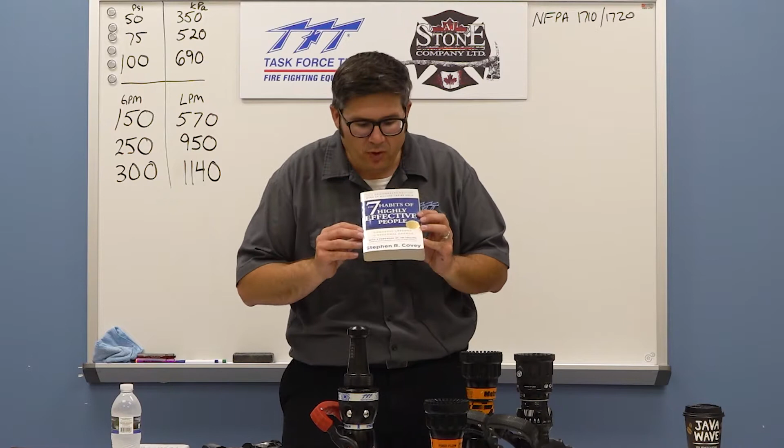So the first thing we're going to dig into right now is general hydraulics and water flow. And I want to reference a book to start us off, The 7 Habits of Highly Effective People by Stephen Covey. The reason I bring this book up is because one of the 7 habits is begin with the end in mind. In other words, what do we want to accomplish when we set out on a new experience, on a new journey, or when we even talk about water flow?

Sometimes in the fire service, we get right into the battle. Smoothbore versus fog, selectable, automatic, this nozzle's bad, this nozzle's good. Before we get into any of that, let's begin with the end in mind. What do you want to accomplish out of your hose line? What is your target fire flow rate? And that's what we should focus on before we get into the types of nozzles. Because at the end of the day, any nozzle, no matter whether it's a smoothbore, fixed, selectable, or automatic, I am able and you are able to get the flow rate that you want out of whatever nozzle you choose. So let's begin with the end in mind.

How do we answer that question of, well, what should my target fire flow rate be? Well, ultimately, it is up to your decision for your response district and your department. But the good thing is there's resources available to you to help make that decision easier. And one of those tools to figure out a target fire flow rate is NFPA 1710 and NFPA 1720. NFPA 1710 is for career departments, NFPA 1720 is for volunteer departments. During my research and preparation for this class today, NFPA 1710 was the only standard that I found that references target fire flow rates.

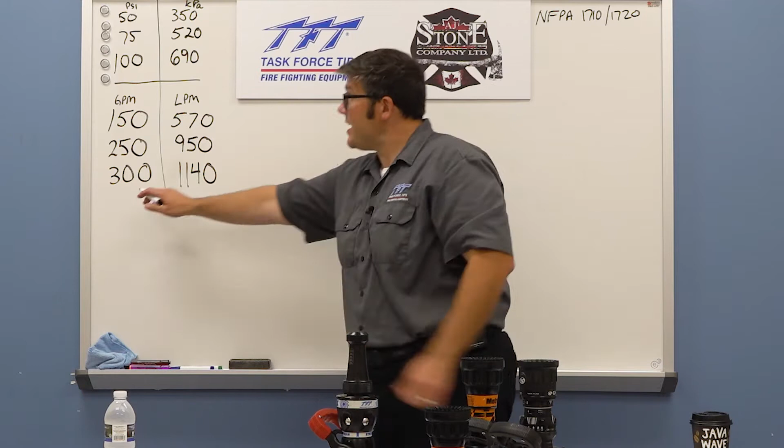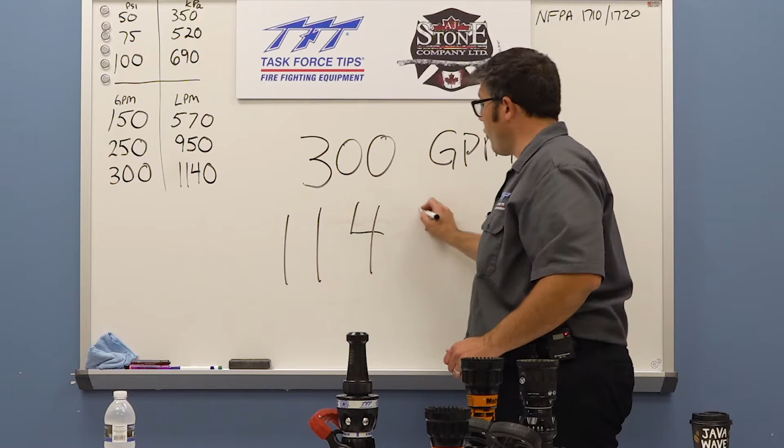NFPA 1710 says for a common single-family dwelling, 2,000 square feet or 186 square meters, your fire department should be able to establish an initial fire attack flow rate of 300 GPM or 1140 liters per minute. Now, that's just a general guideline, but a basis for a lot of fire departments in all of North America.

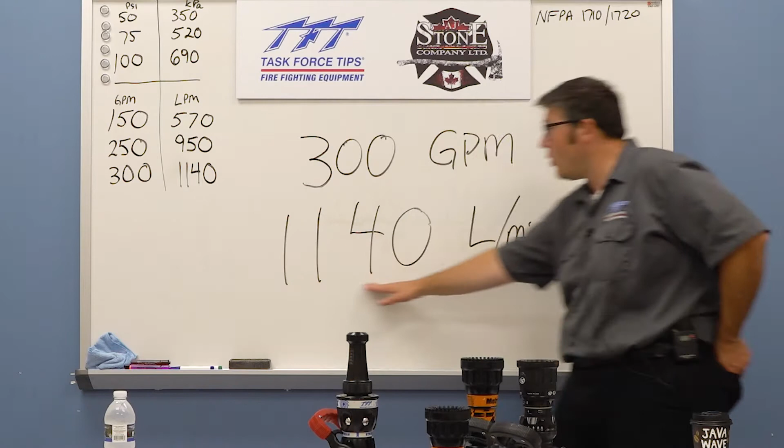This is why when you talk to a lot of fire departments across the country, they have a target fire flow rate of 150 gallons per minute, which is about 570 liters per minute. They have that because to get to this number, 150 out of 2 hose lines equals 300 gallons per minute, or 570 liters per minute out of 2 hose lines gives you 1140 liters per minute. That's why the fire service has derived 150 GPM or 570 liters per minute as a general guideline for a target fire flow rate. Another resource in your backyard is Laura King of NFPA Canada, and NFPA.org allows you to access any of the NFPA standards to help with your decision.

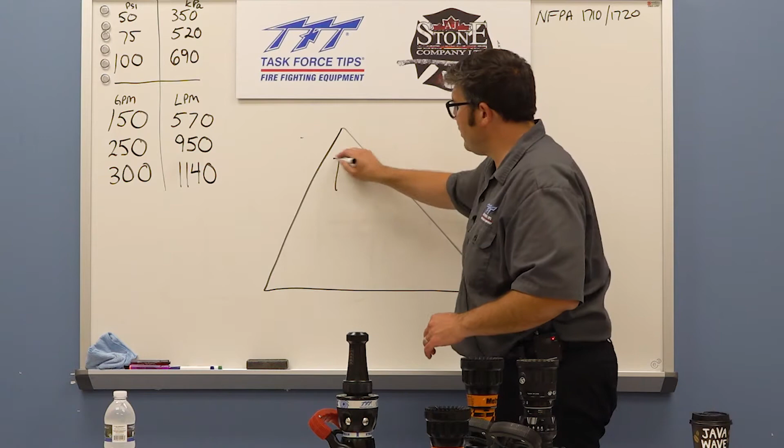Let's talk about flow and pressure a little bit and general hydraulics. So keep in mind, when we all joined the fire service, there was one thing we all learned, and that was the fire triangle. I know technically it's a fire tetrahedron, but bear with me a little bit. Give me a little leeway. The fire triangle was fuel, heat, and oxygen. You take one of those things away and the fire goes out.

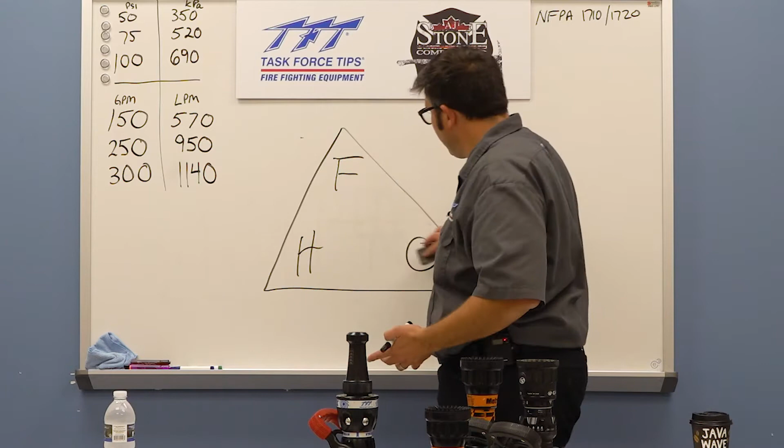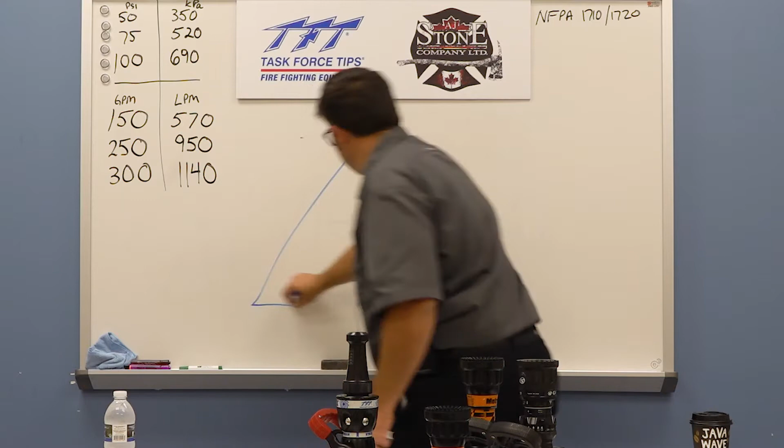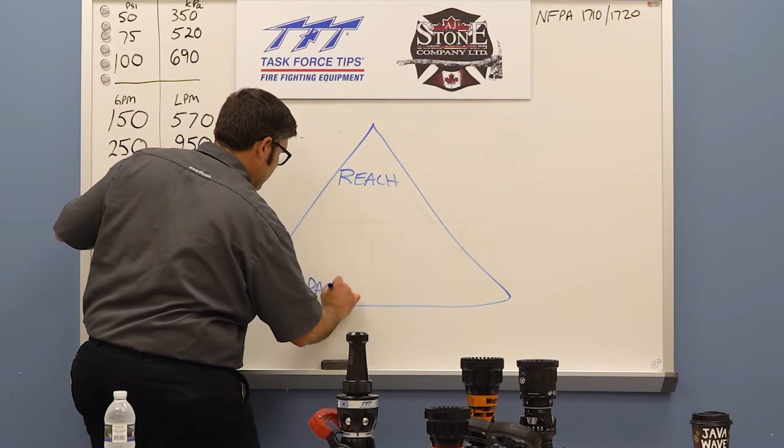I've come up with something called the water flow triangle. And I kind of just made it up on the fly, but if anyone has made it up before in the past, I will give them credit. I just came up with it throughout teaching different classes. So I want to introduce to you the water flow triangle. You have reach, you have impact, and you have reaction force.

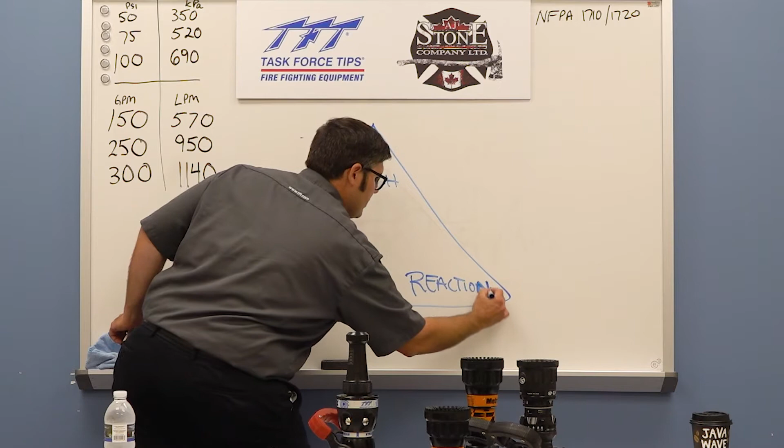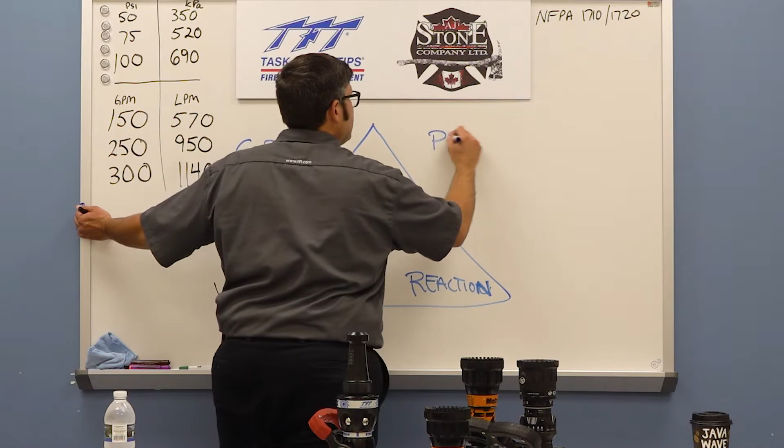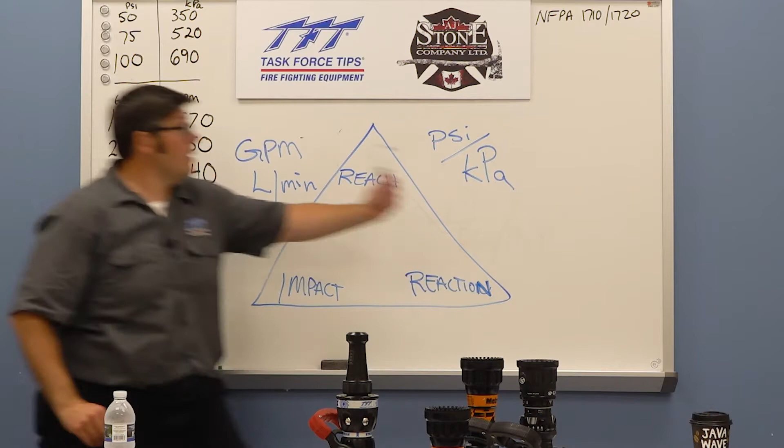Reaction. So GPM, or liters per minute, PSI, or kPa. The liters per minute is how much. The kilopascal or kPa is how fast. That's the basis of water flow.

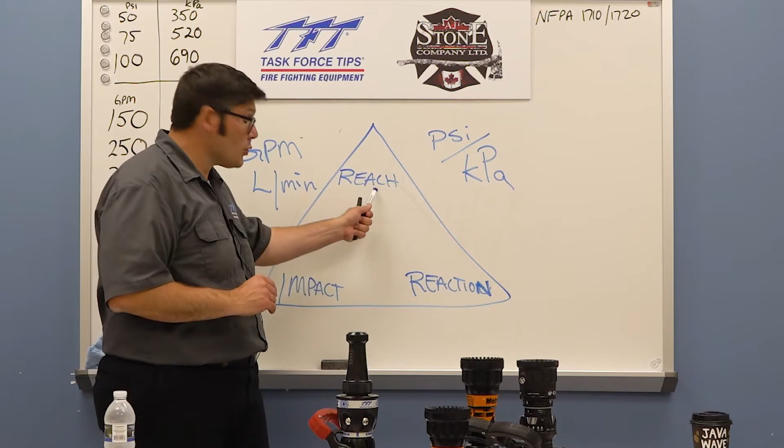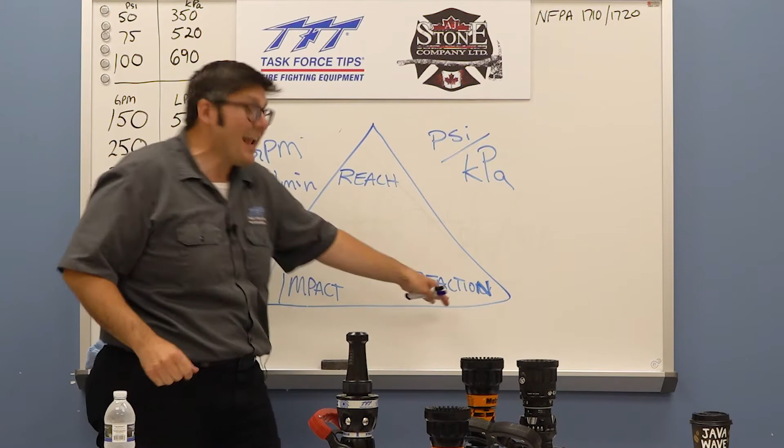The water flow triangle contains reach, how far does the stream reach, impact force, how hard does the fire stream hit the wall or hit the seat of the fire, and reaction force. How much force am I feeling coming back on me at the end of the hose line?

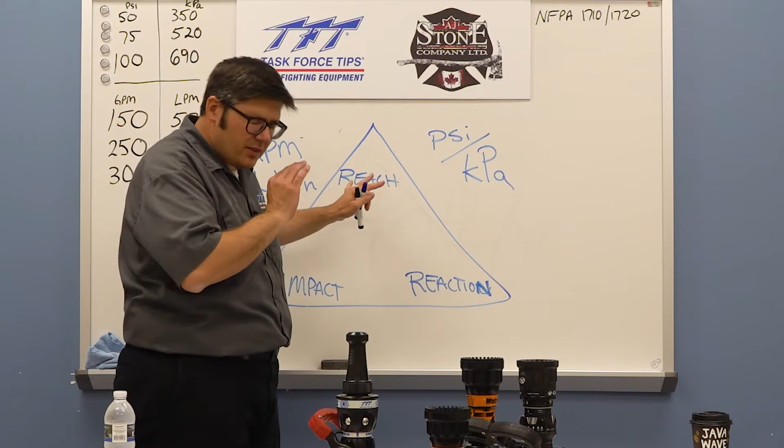The basis of this water flow triangle, if you change how much, liters per minute, or you change how fast, kPa, if you change one or both of those, you're going to have an effect on reach, impact, and reaction force. That's just how water flow works and the principles of physics.

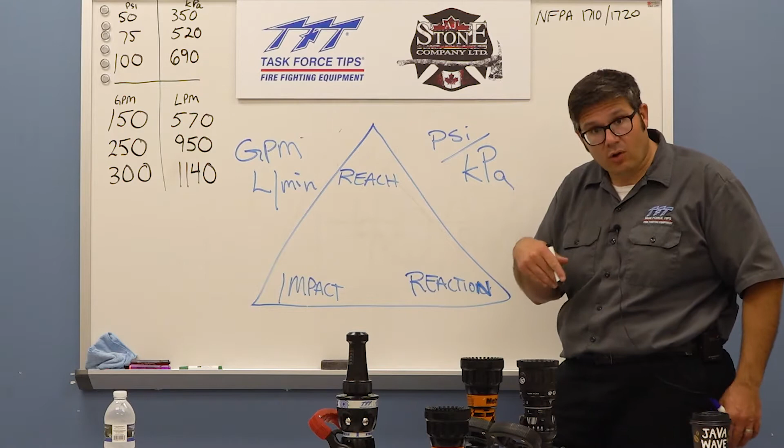You change how much or how fast, and you're going to make the reach higher or lower. You're going to make the impact force higher or lower, and you're going to make reaction force higher or lower. So that's a basic water flow triangle. Now, back to the question, how do we know what we're flowing out of our hose line? And what are we actually flowing?

Well, just like anything else, you need the right tools for the job. So we're going to go outside in just a second to show you how to integrate a flow meter, which is a valuable tool for any fire department. You can use it for testing, training, even during fire department operations. You can use it as much or as little as you want, but it's such a valuable tool, and there's a lot of affordable options out there for flow meters nowadays.

Before we head outside to show you a flow meter setup, I want to reference 2 books that may be valuable to you as a part of fire service leadership. First one is First In, Last Out Leadership by Battalion Chief John Salka of FDNY. Great book, very passionate writer, and a lot of lessons of leadership in this book.

Another book is more recent, Extreme Ownership, How U.S. Navy SEALs Lead and Win. This book is awesome because it constantly bounces back between a military U.S. Navy SEAL operation and a real life experience, and applying what the Navy SEALs have learned about accomplishing missions to real life scenarios. So 2 books, actually 3 books if you include the 7 Habits, that may be valuable for you for any rank of anyone in the fire service. So we're going to go outside and show a flow meter setup.

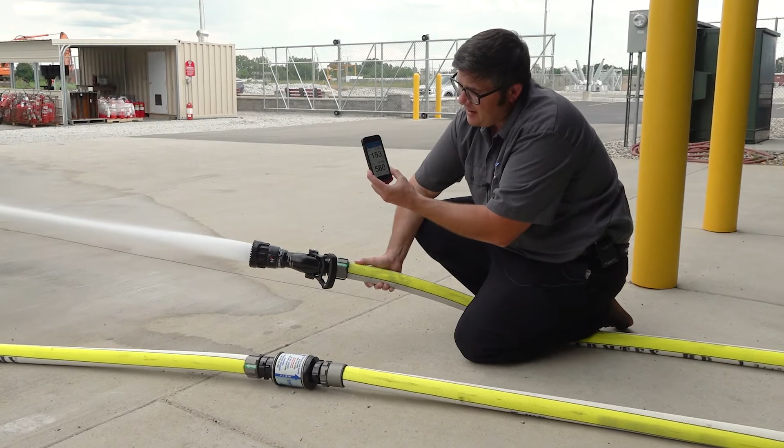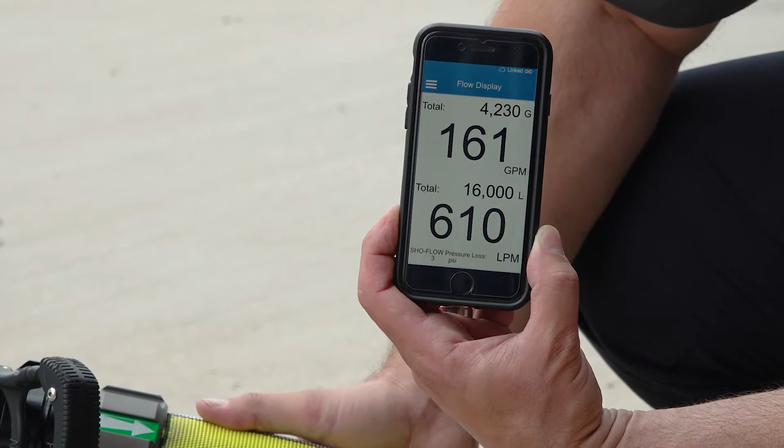The nice thing about it is it generates its own power, so you can connect to a Bluetooth signal that allows you to see the flow rate in real time. So right now you can see that we're flowing about 160 gallons per minute or 610 liters per minute. You have the ability to switch from GPM to LPM, and it's all self-generated. You don't have batteries for this flow meter, and you don't have to connect wires for the flow meter. It generates its own power and Bluetooth signal.

What a great training tool, or even fire ground tool, in the right situation to see your flow rate. Now you can adjust your pump pressure to achieve the flow rate you want out of the end of the nozzle. Going back to, what do you want your target fire flow rate to be? Next segment, we'll be walking over to the standpipe connection and talking high rise.

So just like any other firefighting situation, I challenge all of you and my own department and everyone else, evaluate the solutions that are out there. Find the one that's going to give you the maximum advantage for your response district. It's not just about what we show you over the internet or other manufacturers. It's about getting out there with your representatives like AJ Stone and evaluating solutions and finding the right fit for how you do business, and that's an important aspect.

With high-rise firefighting, you need the right tools, just like any other firefighting application. This new valve configuration is built for Class 1 or Class 3 standpipe connections.

A Class 1 standpipe connection is just a single 65 mil valve, and a Class 3 standpipe connection has the 65 mil valve, but it also is combined with a hose cabinet with probably 38 millimeter hose line. So Class 1 and Class 3 standpipe connections are what primarily fire departments utilize. Class 2 is mainly for office personnel or residents of the building.

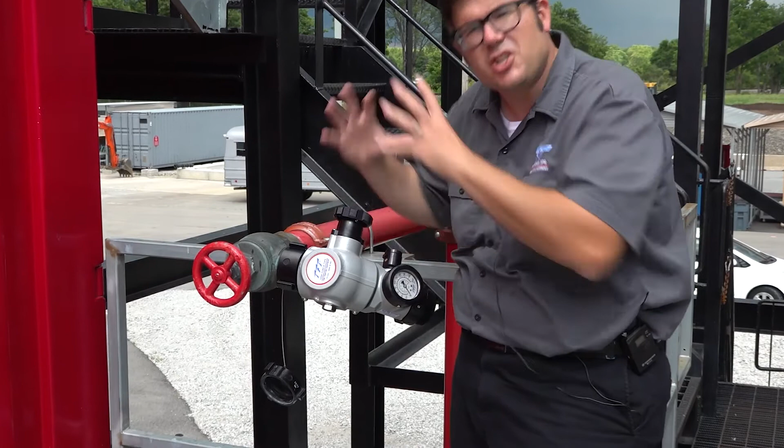So this high-rise solution gives you an advantage because it swivels 360 degrees, allowing you to position it against a wall or position it in a different configuration within a hose cabinet. It also has an inline pressure gauge which swivels 360 degrees. Again, getting the fit for your response district. You don't have to fumble with multiple pieces with this type of solution. It's a one and done, totally integrated solution that gives you the best of all the options out there in one nice, easy to install solution.

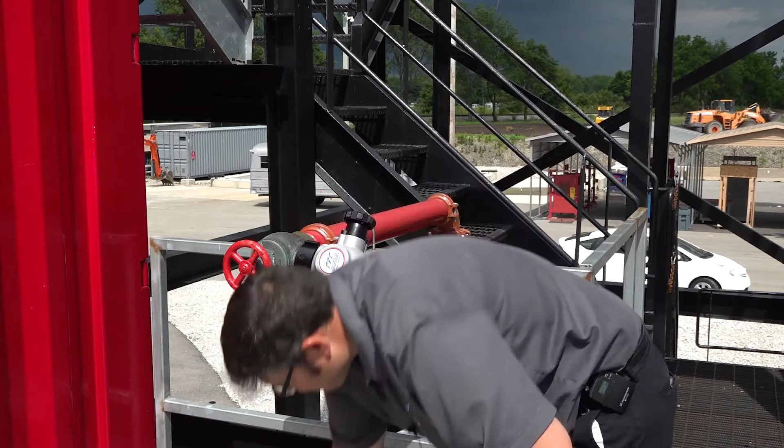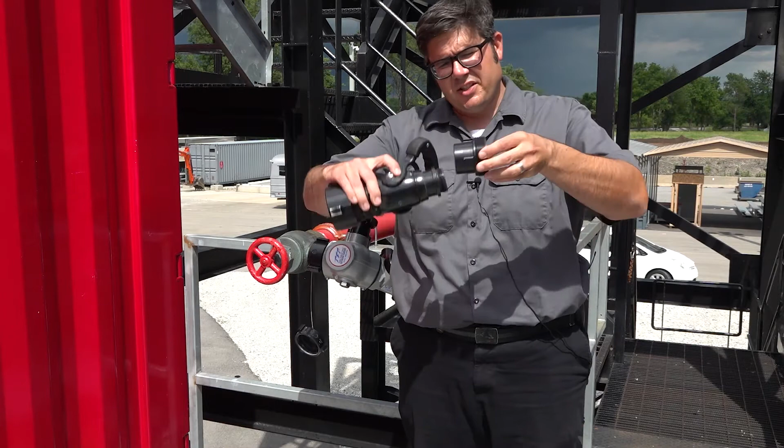A couple other tools that you may want to include in your high-rise kit: an increaser and a reducer. An increaser gives you the ability to shut your nozzle down, and out of the front end of a nozzle that has 38 millimeter threads, you can increase it and add more 65 millimeter hose line. So that's the advantage of an increaser.

We also have a reducer. This allows you to reduce the appliance down to 38 or 45 millimeter hose line, or you can actually install the reducer right to the standpipe if you want to run 38 or 45 millimeter hose line.

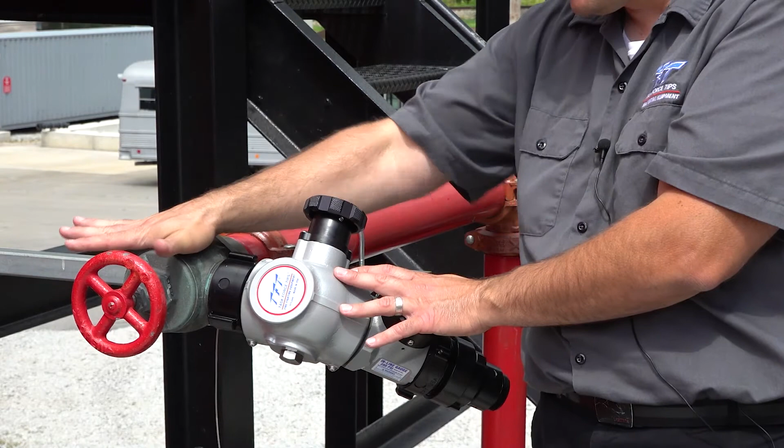There's two schools of thought when it comes to high-rise appliances. Some major departments don't want an extra valve, so they would configure this appliance with no valve. It would look the same without the valve handle. They only want to use the valve that's on the standpipe. And then the other school of thought is this: they have the valve on the standpipe, but they like to fine-tune the flow and pressure with this style of appliance. Again, what makes the most sense for your department? That's it on the high-rise segment.

The next segment we'll go over is portable monitors, and driving home the fact that it's not just for surround and drown. This is a common monitor that you would see in the fire service for quick deployment of a high volume of water. This monitor can achieve up to 500 gallons per minute or 2,000 liters per minute, but it's a very basic monitor and probably the most common in the fire service.

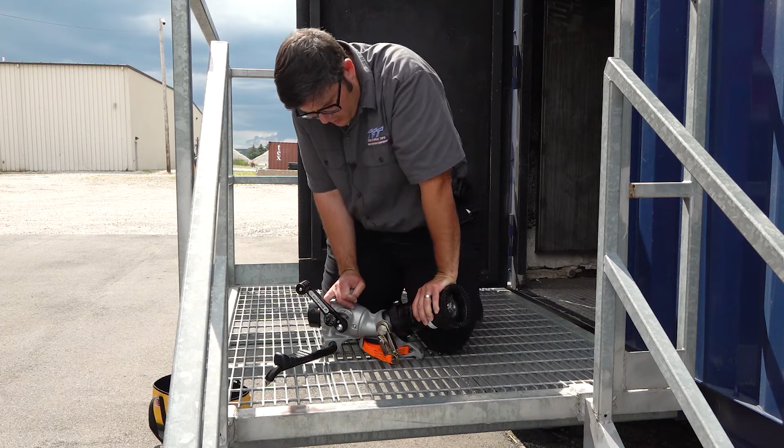It does limit your capabilities, meaning if you want a lower attack angle, you have to press down and hold in the lower attack angle. If you need a higher attack angle, you really can't do anything about that. You have to actually move the entire monitor back and forth until you're on target. There's other types of monitors out there, and this is where I challenge you again to make sure you evaluate the options out there and run them through the paces. There are other options out there that give you excellent tactical advantage on the fire ground.

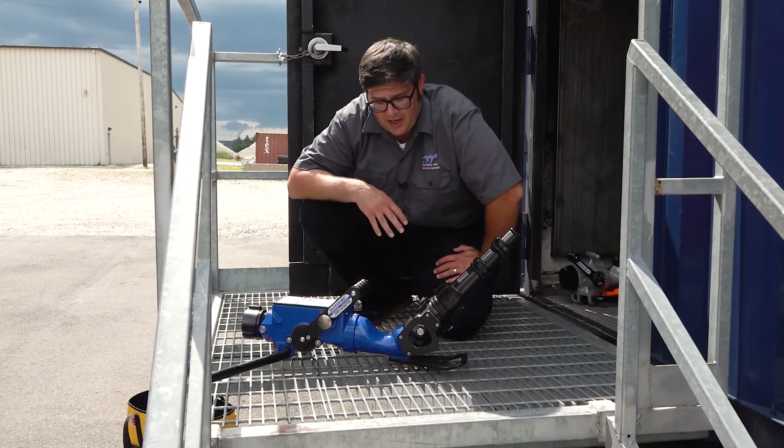Don't limit yourself to thinking about portable monitors as a defensive firefighting tool. With the right monitor, you can have superior tactical advantage on the fire ground and use it as an offensive tool for firefighting. One firefighter, one hose line can deliver a heavy knockdown on a fire or knock it out completely very efficiently. So I'll show you one of those monitors right now that give you the added tactical advantage. So this monitor right here can still achieve up to 2,000 liters per minute or 500 gallons per minute, but it gives you a lot more tactical advantage.

This monitor is able to go down to 10 degrees, low attack angle, and the benefit to this is that you don't have to press and hold that low attack angle. You set it at 10 and it's ready to rock and roll. And you're able to get into a front door, you're able to, depending on the elevation of the house, hit a basement fire through a basement window. A walkout basement you can definitely get at. Garage fire with car involvement. There's a lot of tactical advantage to this low attack angle. You can hit the heart of a kitchen fire through the front door.

Lots of advantage. This is the only monitor also that goes up to 86 degrees. This gives you a whole other world of tactical advantage and ability on the fire ground. You can get into a second, third, even a fourth story window from the ground level. You can get into the attic space of a custom built home with a high cathedral ceiling. You can get into the ceiling space fire area of a Rona or a Home Hardware, church, gym, school. You can get into the eaves of the building for an attic fire.

You can hold the stairs, protect the stairs, or protect a means of egress for your interior firefighting crew. There's so much ability that this gives you on the fire ground. But again, you have to evaluate it and pick the best thing for your department. We've covered general hydraulics, high-rise, portable monitors. The next thing we'll cover is foam delivery.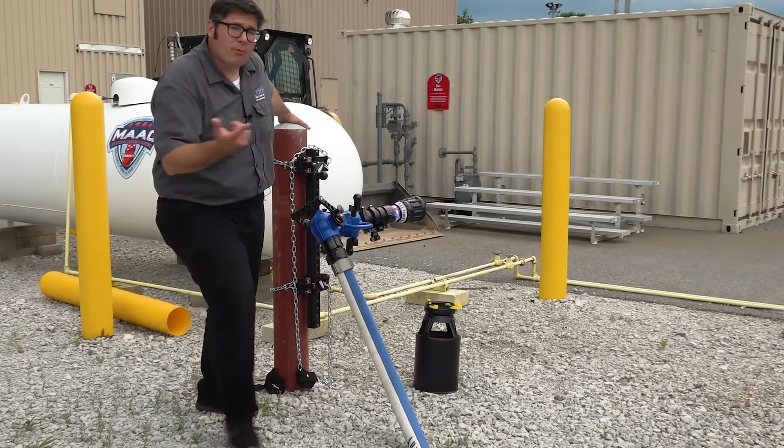So another type of portable monitor is this monitor called the Hemisphere. This is in its own category and unique. This is a monitor that's called a transportable monitor because you're able to clamp it to a parking post like this. You can operate it into a trailer hitch receiver. You can clamp it on a set of handrails. You can clamp it on a set of rated scaffolding. You can clamp it on anything 3-inch or 2 feet in diameter.

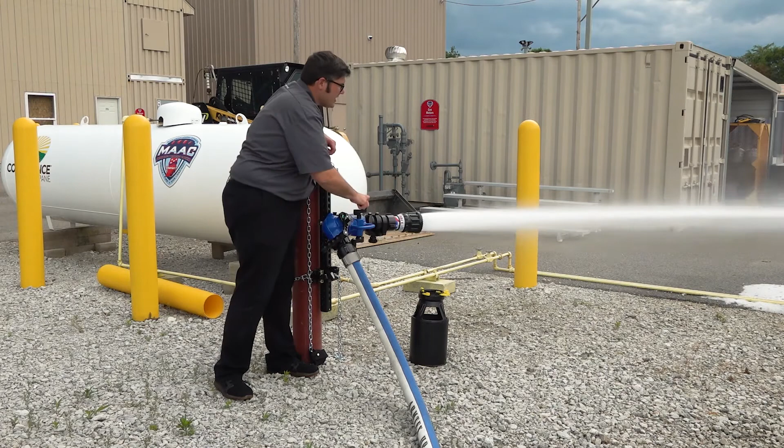And it allows you, again, to deliver up to 2,000 liters per minute from virtually anywhere. We call it the Hemisphere because you can flow water up, down, left, right, and anywhere in between. We'll start to operate it right now. So as you can see, it's very easy to operate. And you're able to adjust that flow path very easily and deliver high firefighting flow rates in a very unique way.

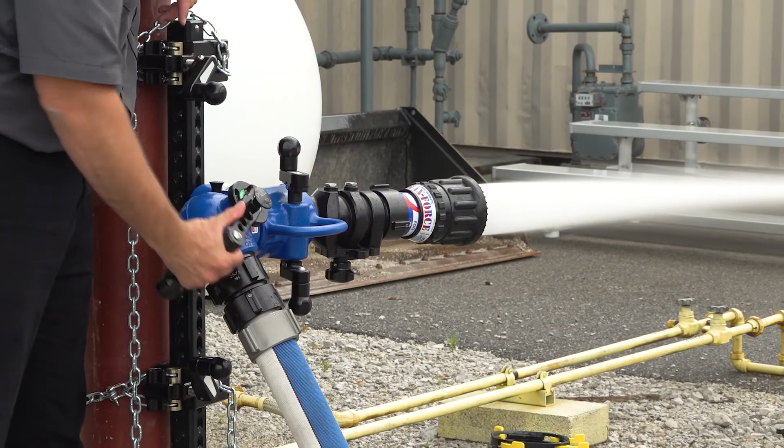The inlet of the monitor swivels 360, so you can easily attach your 65 mil hose line, and this monitor actually swivels 360 when you're not flowing water or you're unpressurized. The next segment truly will be foam delivery.

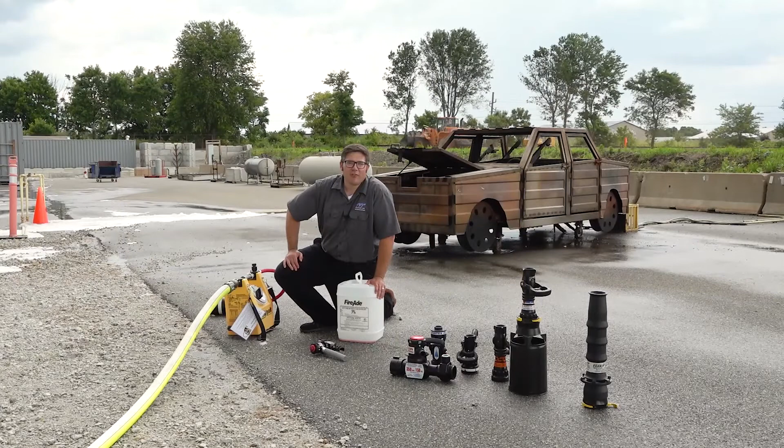All right, on to foam delivery. We're using FireAde foam concentrate today. All this concentrate is in this ProPak portable foam solution. This is a great tool because it puts the foam controls right in the hands of the firefighter themselves, not at the truck. So the firefighter can control the foam supply and the expansion ratio right here. It makes foam delivery very easy.

Dumpster fires, car fires, wildland firefighting, salvage and overhaul, shipboard firefighting, anywhere where you need fast quality foam and very easy to make. So right now I have the ProPak on 3%, and you can see this little yellow portable foam system can make a lot of good quality foam, a good quality foam blanket. I personally have used it on car fires, but it's a great tool for quick, easy to make, high quality finished foam.

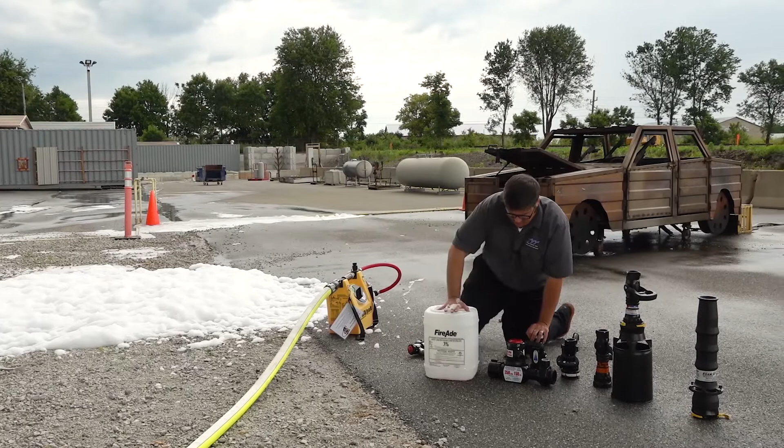If you don't have a portable foam system, there are other ways to deliver foam. There's certain variables in a foam system. This is foam concentrate. When foam concentrate is mixed with water and goes through a hose line, it's called foam solution. And when it goes out the end of the nozzle, it's called finished foam. Foam concentrate, foam solution, finished foam. So what are the variables? If you have an onboard foam system, it makes it easy. You press a couple of buttons and you start to deliver foam.

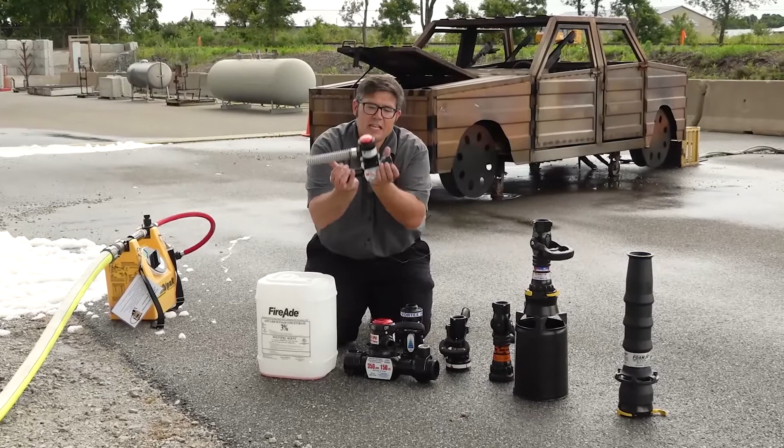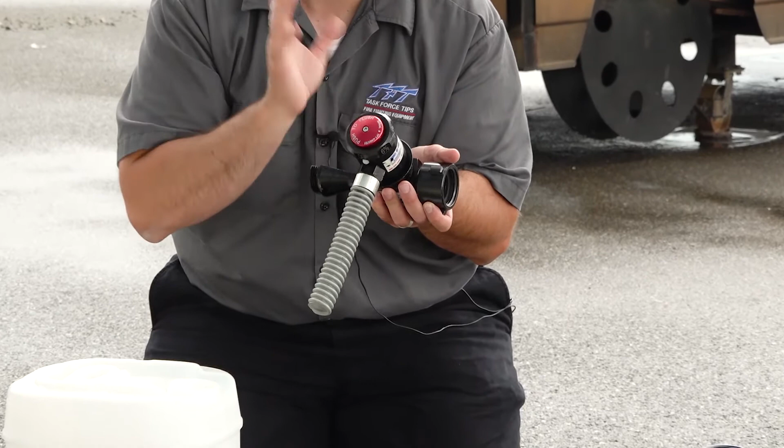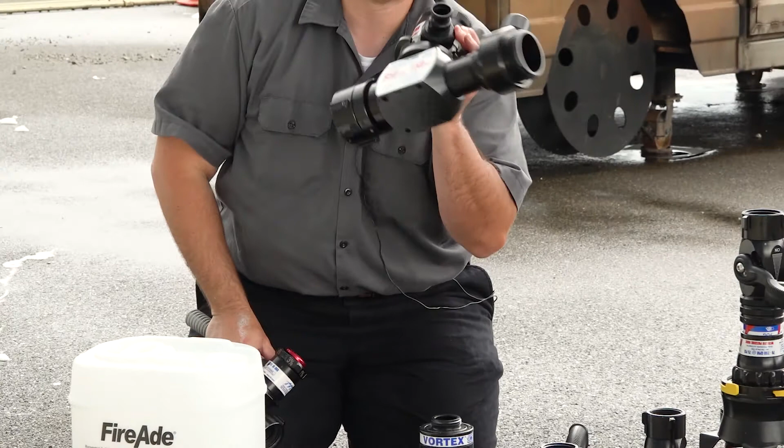If you don't have an onboard foam system, you will need to use a foam eductor. This foam eductor has a quick disconnect and a red button, and both of those features allow this eductor to be cleaned and rinsed out at the scene of the fire. So you'll never have to worry about it getting clogged up. This eductor is also available in a large flow rate to flow foam out of a portable monitor.

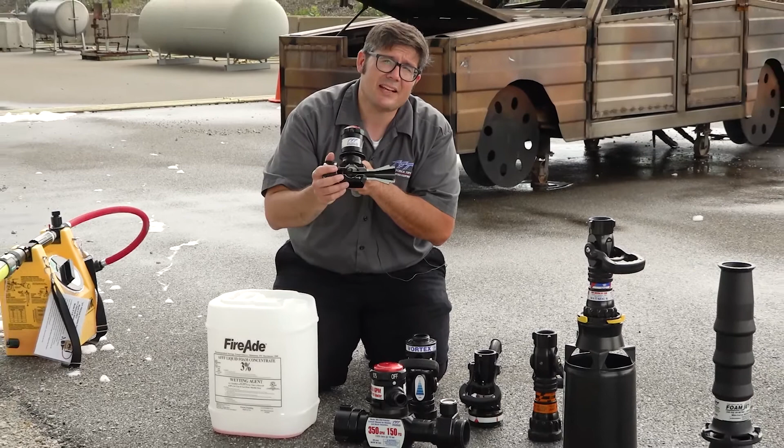Once you have the foam eductor, you have to make sure you have at least 200 psi at the inlet of this eductor, or about 1400 kPa, I believe. I may be a little off on that, I apologize, but make sure you've got 200 psi at the inlet. Make sure your nozzle's all the way open. And to make the best finished foam, you want to make sure the flow rate of the nozzle matches the flow rate of your eductor. If it doesn't, your foam may be too lean, or it may be too rich, or you may not make hardly any finished foam at all. So you have to be careful. Make sure that nozzle matches the eductor flow rate.

Another thing to help you make good finished foam is an aspirating attachment. This attaches to any nozzle and sucks in air and agitates the foam so you can get a good thick quality blanket of foam like we delivered earlier.

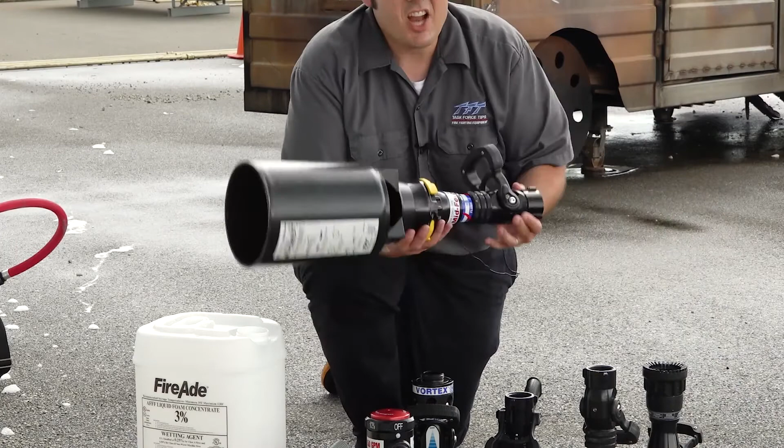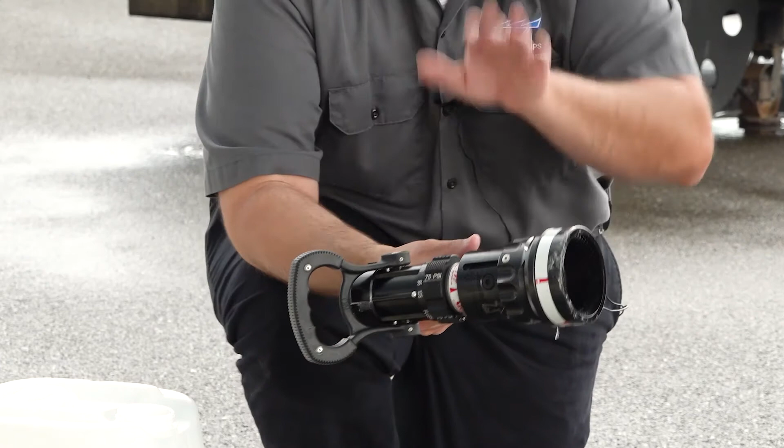There's another type of nozzle out there. Instead of getting a separate foam attachment, we have a nozzle like this called a Quadrafog. This Quadrafog nozzle is a selectable or adjustable GPM nozzle, and it has an integrated foam attachment. It's not going to make as good a finished foam as an attachment like this, but it can still get the job done for multiple incidents. And again, you don't have to buy that separate attachment. It's built right into the nozzle.